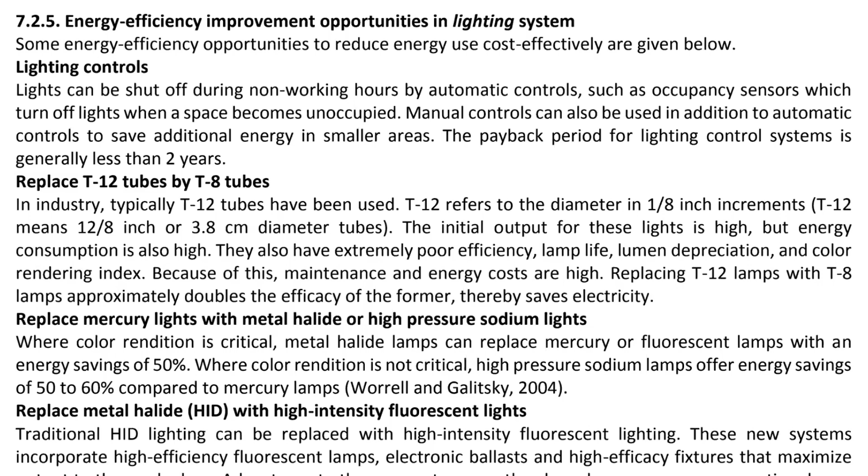Next is the tube lights which we used to purchase and use in earlier days - the T12 tube light. T12 refers to the diameter in 1 by 8 inch increments, so T12 means 12 by 8 inch or 3.8 centimeter diameter tubes. They had poor efficiency, lumen depreciation, less lamp life, and color rendering problems. Replacing them with T8 lamps improves efficiency in a 1:2 ratio, or you can say it is doubly efficient than T12 tube lights.

Then if we replace mercury lights with metal halides or high pressure sodium lights, it's good, because when color rendition - meaning performance - is critical, these metal halides can replace mercury or fluorescent lamps, with energy saving of 50%. When color rendition or performance is not critical, we can use high pressure lamps, which offer energy saving of 50 to 60% as compared to mercury lamps.

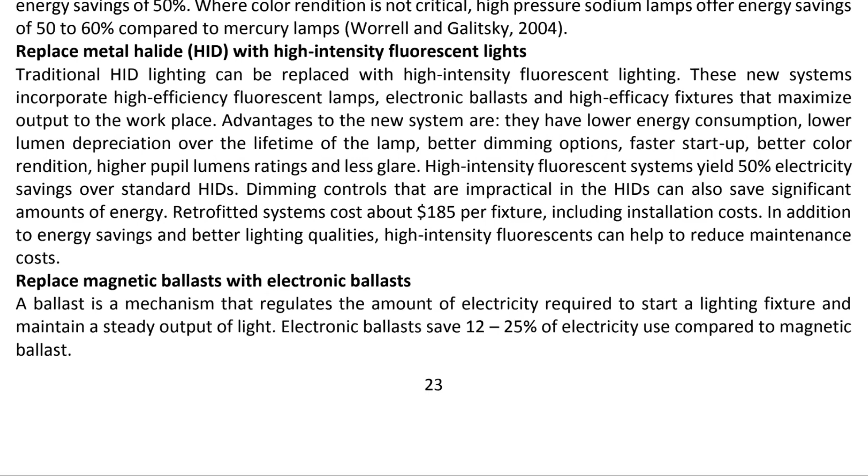What do we mean exactly by color rendition or color performance? For example, take a jewelry showroom dealing with gold. As customers come, they show their products - rings, anklets, chains, etc. The natural color of gold is somewhat yellow or brown. So if the showroom owner uses metal halide lamps or any other lamp with a similar yellowish outlook, it will add value to the products.

Similarly, if the jewelry businessman deals with silver products, silver is by default white in color, so it's advisable for him to use more white tube lights or white LED tube lights, so that the silver jewelry products are more reflecting and he can sell them easily. This is the concept behind it.

Similarly, if we replace metal halide with high intensity fluorescent lights, it is good. High efficiency fluorescent lamps include electronic ballasts and high efficiency fixtures, because earlier in tube lights we used to have a magnetic choke and starter system, which was not good enough - the same performance efficiency issue affects here as well.

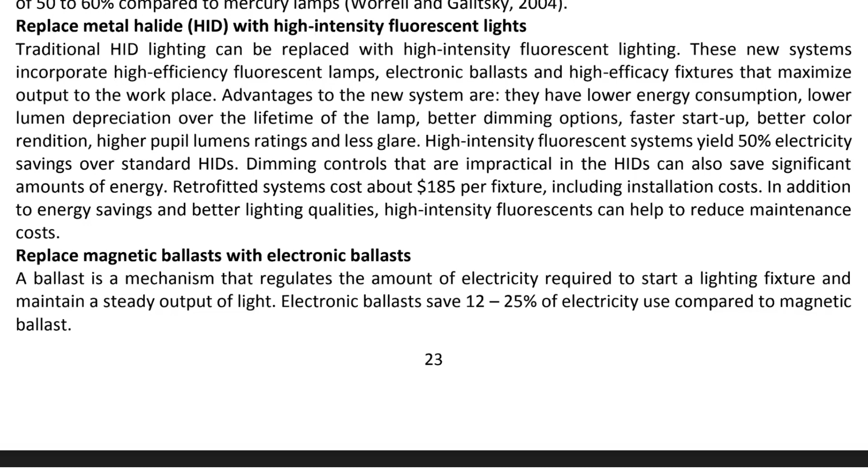So there are better dimming options, faster startups, color rendition, and it is also good for the eyes - it has less glare. These are the advantages associated with high intensity fluorescent lights.

Next is the magnetic ballast and electronic ballast. We can say that the electronic chokes which we use nowadays are far more effective than the earlier system which was based on the magnetic ballast.

Those magnetic ballasts are used to regulate the voltage, so the tube light or bulb receives voltage such that it does not overheat or explode. It was based on that principle.

But in the case of the electronic ballast, after the flow of electricity through a series of induction coils, they can alter the flow of electricity and change the frequency without changing the voltage. So this is the good thing about it.

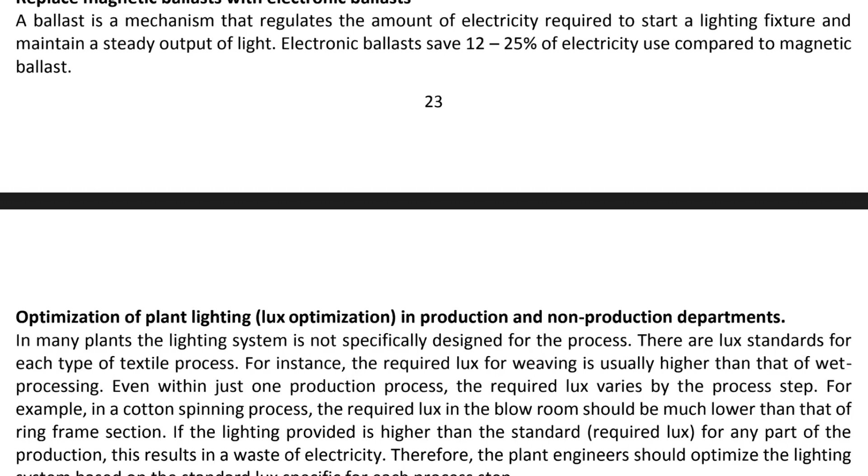The frequency range is also very large in this case, so the flickering problem is also not there. The electronic ballast results in energy saving of 12 to 25%, which is very good.

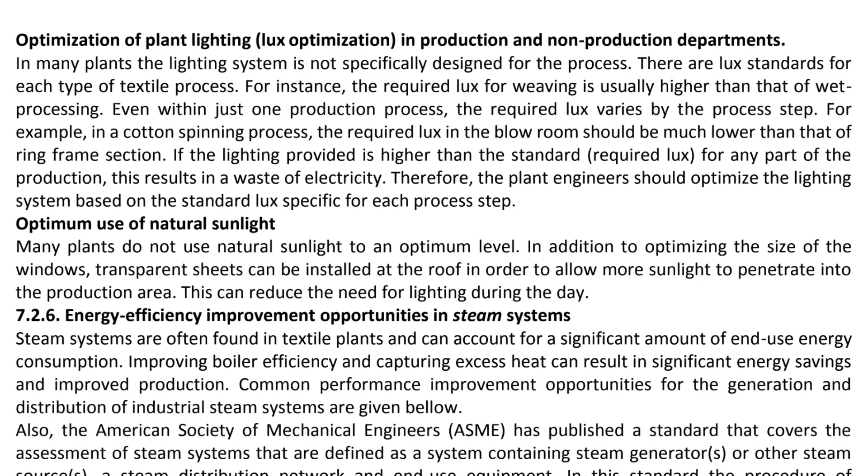Then there is the design of the plant. The design should be such that natural light comes easily to the plant, so there is minimal use of artificial lighting. For example, in the ceiling part, or sometimes in the reception area, it can be designed using ventilators or overhead sheets so that natural light can enter. This natural light also affects energy saving.

Next topic is energy efficiency improvement opportunities in the steam system. Broadly, steam systems are generally found in textile plants and in electrical power generation, where there are boiler systems and generators.

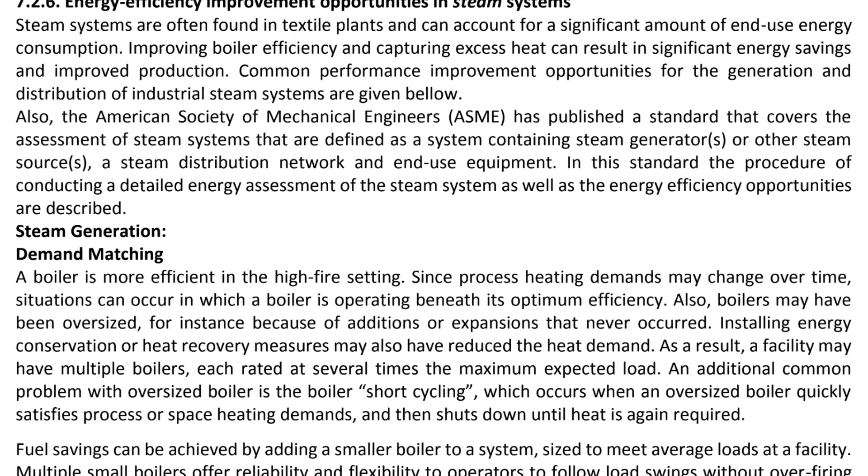We are talking here of thermal power plants, which prominently use coal. The coal is fired, then water is turned into steam, and that steam is used. The same steam can be generated using nuclear power plants. In electrical power generation, gas power plants use gas as fuel, but the steam is generated and the rest of the process is the same.

So how can we best utilize this steam generation and its operation? First of all, the boiler should be efficient in the high fire setting. In the high fire setting, if the demand is more, the boiler can generate a large amount of steam. The problem associated with this is that all boilers are generally oversized.

At the time of planning any boiler for textile industries, it was based on the fact that in the future we are going to have plant expansion or more power generation, so we will require more power and more steam. So the boilers are oversized.

When they are oversized, and if not used to full efficiency or full load, then the output will be less. The common problem with oversized boilers is short cycling, which occurs when the boiler quickly satisfies the heating demand and shuts down again.

If it is based on a good efficiency boiler, it will boil easily in less time, but it is not meant for that.

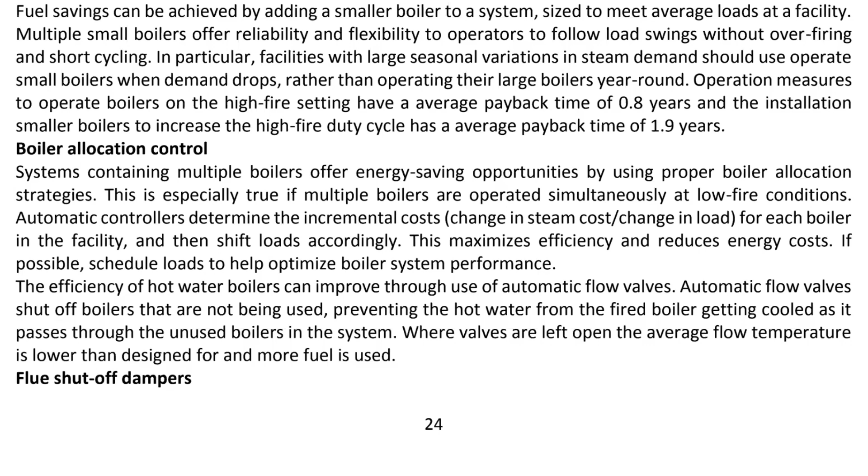So fuel saving can be achieved by adding small boilers. If we have small boilers, that can be the best option under the present circumstances. Operating measures to run boilers on high fire setting have an average payback time of 0.8 years, and installation of smaller boilers has a payback time of 1.9 years. This is the payback period associated with boilers.

Next is the boiler allocation control.

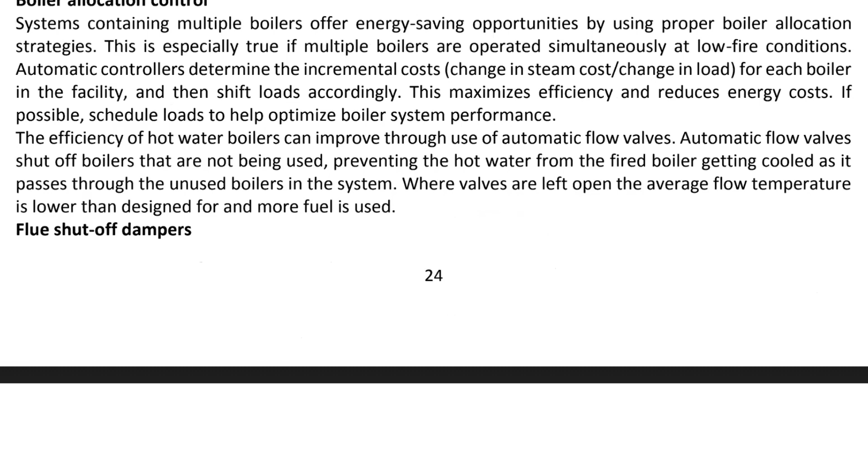So in this, we should have multiple boilers, and proper boiler allocation should be there depending upon the demand, and automatic controllers should be there which can regulate the fuel or regulate the steam generation using automatic flow valves. So that is a good option for energy saving.

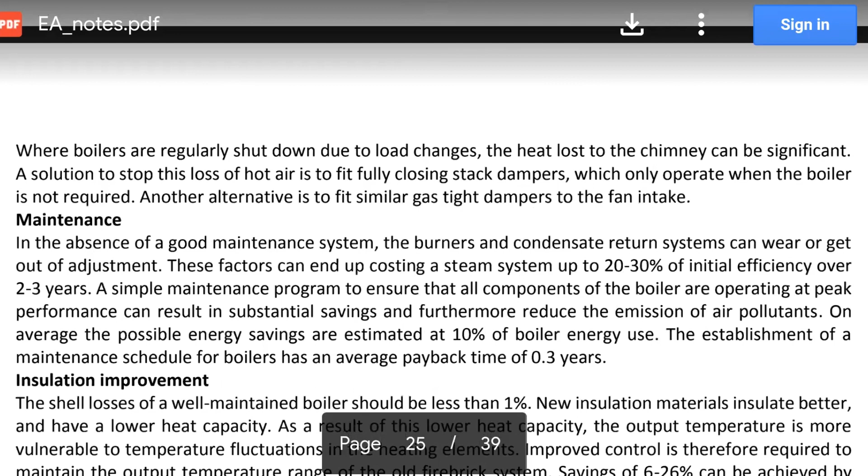Next is the flue shut-off dampers. When boilers are regularly shut down due to load changes, the heat lost to the chimney can be significant. A solution to stop this loss of hot air is to fit fully closing stack dampers, which only operate when the boiler is not required.

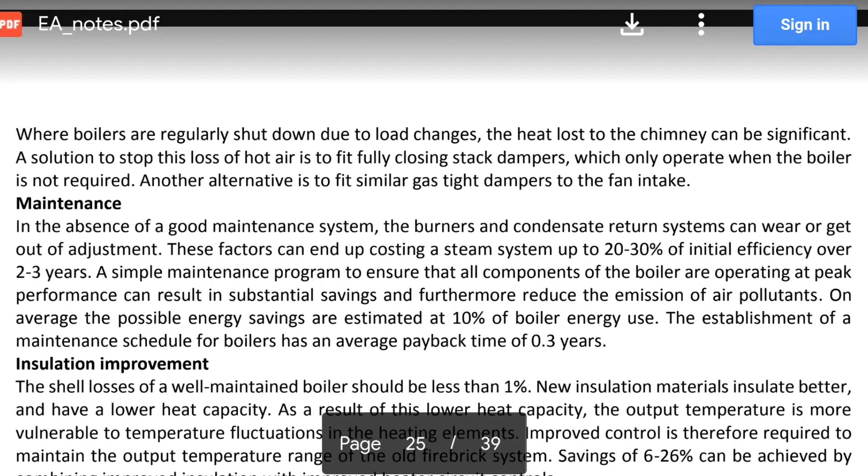So it emphasizes the point that if we are frequently switching the boilers on and off, then heat is lost through the chimney and the boiler cools down, and when we need to restart it, we again have to go for combustion and heat up the boiler to rising temperatures to use it effectively. So here the proper boiler allocation system is to be taken care of.

Next is maintenance. The burners and the condensate return system undergo wear and tear, so they should be maintained frequently. It also happens in our domestic applications.

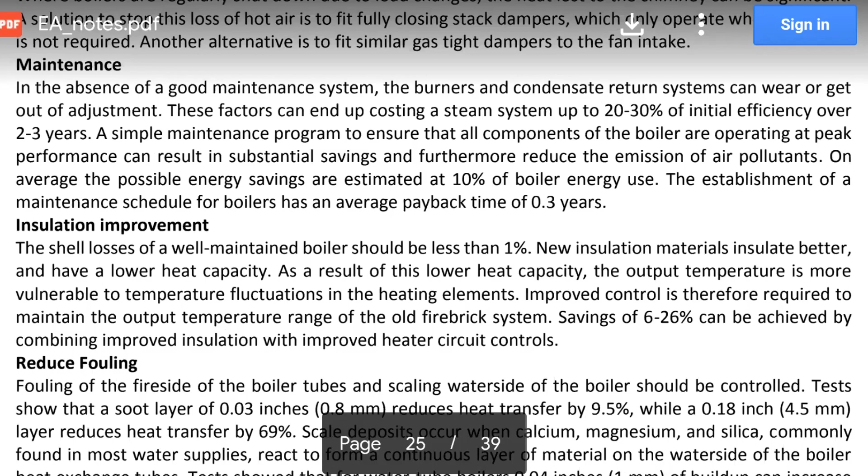Next subtopic is reduced fouling. In the boiler tubes, on the inside there is scale formation. That is due to the chemicals and different salts present in the water, and it reduces the efficiency of steam production. And on the external side, there is the formation of soot.

So what is soot? Soot is the carbon black layer. When that carbon black layer forms to approximately 0.8 mm, the heat transfer is reduced by 9.5%. Similarly, if it reaches 4.5 mm, the heat transfer is reduced by 69%. So it should be regularly maintained and removed. Sooting is a big problem.

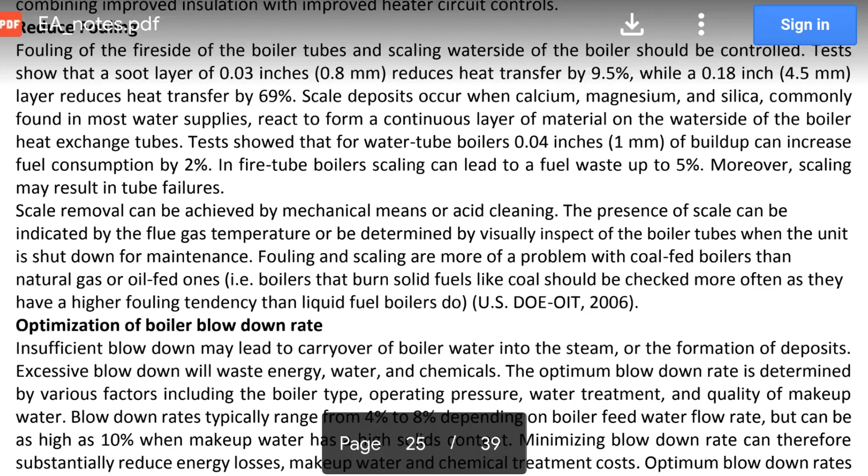And for scale deposition, as I just mentioned, calcium, magnesium, and silica are the common chemicals present. Water tube boilers and fire tube boilers are the two main boilers where scaling occurs. It can be removed by mechanical means, mechanical abrasion, or by acid cleaning, whatever suits us.

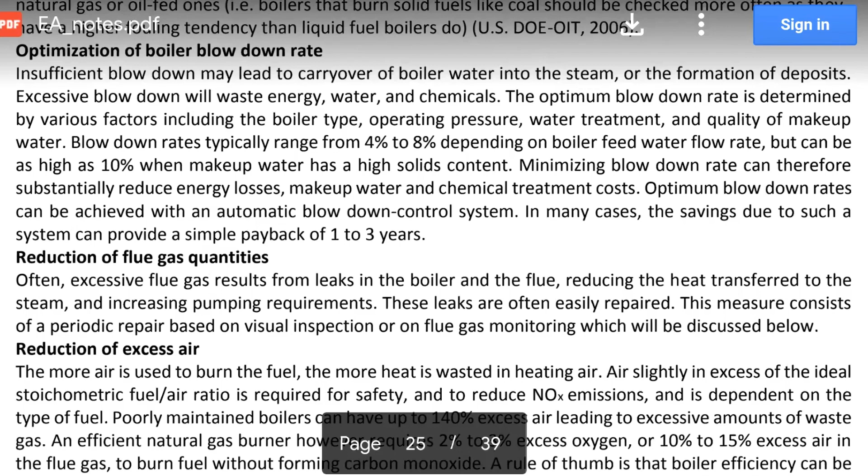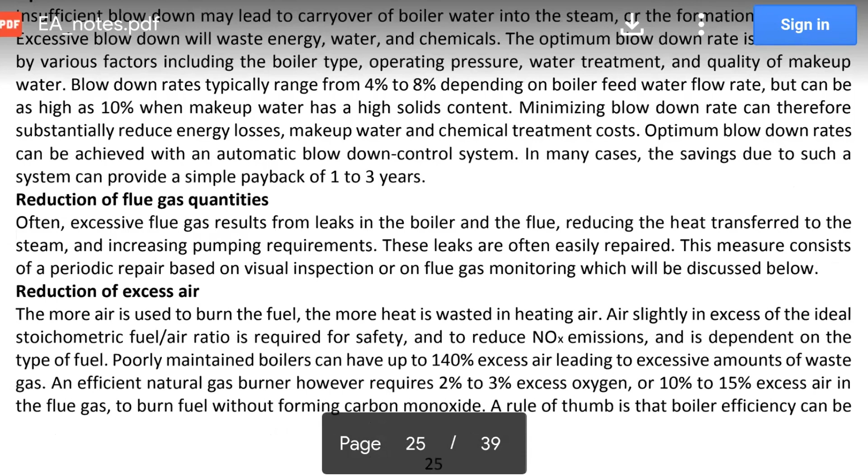Next is the optimization of boiler blowdown rate. This is about how we can best go for heat recovery. This waste energy, waste water, or condensate, before it exits, we should tap its heat. Same is the case with the flue gases. Before the flue gases leave the boiler through whatever exit path, whether through the chimney or otherwise, their heat should be tapped.

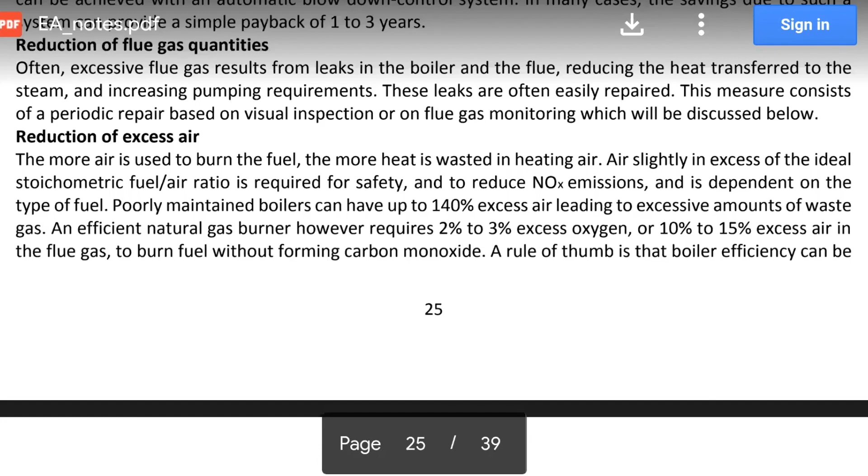Next is the reduction of excess air. Although air is required for complete combustion of the coal, air slightly in excess of the ideal stoichiometric ratio, the fuel-to-air ratio, is required for safety, and it helps in reducing nitrogen oxide emissions. So this is to be taken into account. Flue gas monitoring I have just mentioned.

Next is the economizer. Heat from the flue gases can be used to preheat the boiler water in an economizer. So this is the instrument used for heat recovery. The recovery from condensate and blowdown I have just mentioned.

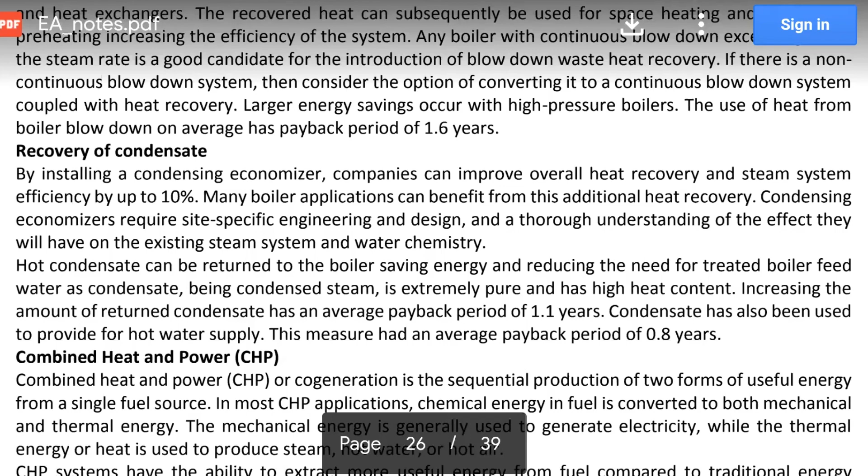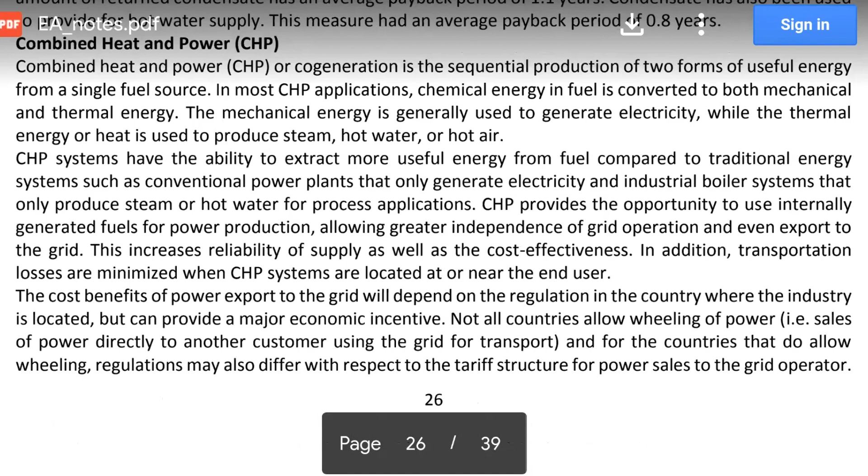The best possible method is to use combined heat and power plants, or cogeneration. It helps in tapping the heat, so that heat can be used to boil or at least raise the temperature of the water, so steam generation can be achieved in less time and with less fuel consumption. So this is the CHP, or combined heat and power, method.